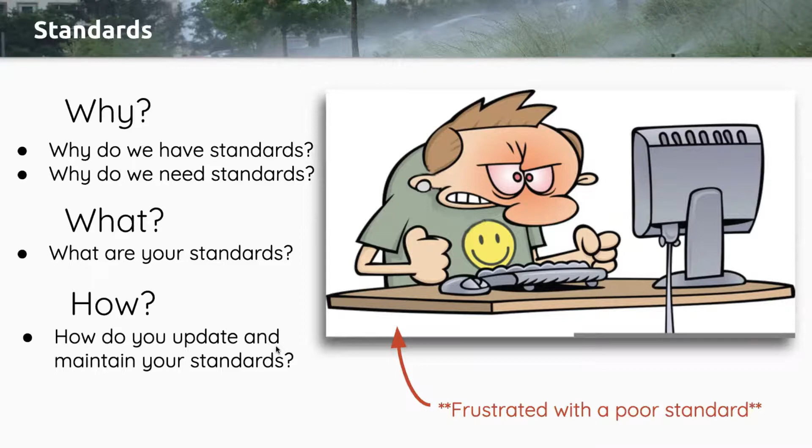And then how do you update those standards? How do you maintain those standards? So really, we talk about a standard as something to keep things organized, but if you think about it, a better way to describe standards is really a process for updating them. So it's more of an action—if I have a standard, it's about the process and how I can go about that.

Jer's donut analogy fits right in with this—it should not be static. It should absolutely be something that can change and should change. Things improve on a day-to-day basis. Everything we start to do, there's always something newer and better coming out. And to be able to roll with those and say, you know, I really like this look, or we should have donuts every other week because that's healthier than every day—this is going to be our new standard.

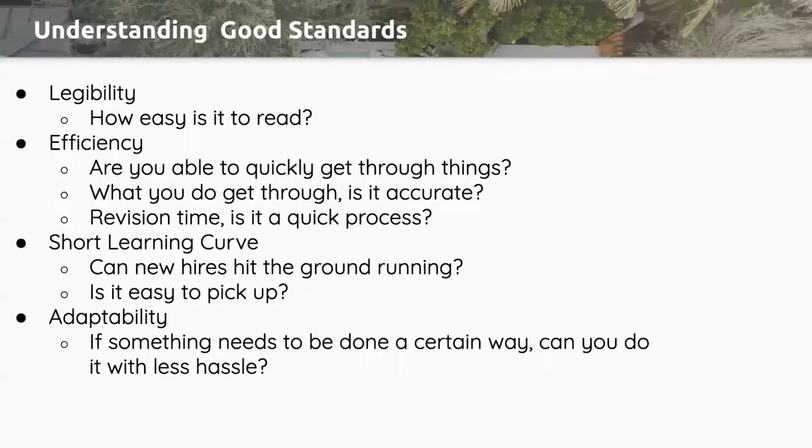So going further into what a good standard really consists of: how easy is it to read? What kind of efficiency are you gaining from the processes you're doing? What you do get through—is it actually accurate? How do you know that it's accurate? A huge one is the learning curve. When you start to hire people, on both sides of the spectrum, when you bring somebody on to help a project and they have to learn your standards, how easy is it for them to pick up? Or is it just like pulling teeth? And then how do you adopt and adapt to those certain ways.

I love this comparison, kind of a play off of 'my dad is stronger than your dad' type of thing - my circle's better than your circle. So we totally get that symbols and the look of plans should be your own.

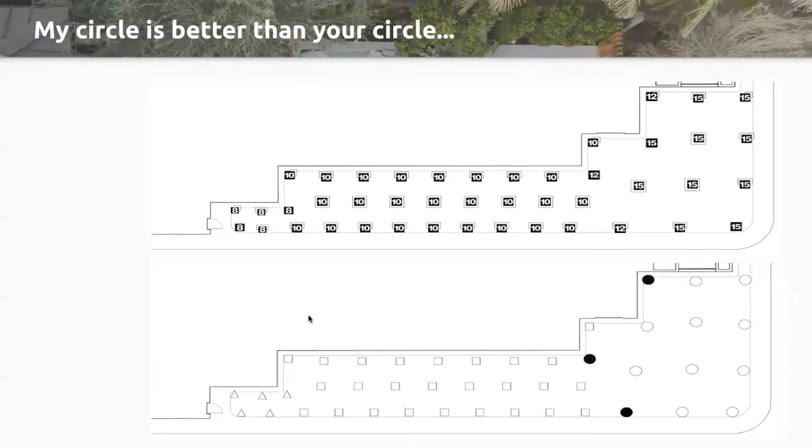But what we should also consider is what you're actually gaining from the way you're doing things, and what we're leaving up to the contractor, since that's the person doing this project. It doesn't matter how we think it looks on the plan - how's it going to get installed? We can talk about notes, callouts, and legends, but if we just take a simple snapshot of an area, who's going to know what's going on in the bottom versus the top?

So just something to consider as we look at upgrading and updating those standards to be more universal. Not only universal, but there is some lingo in the irrigation industry that leads to more typical and standard practices of reading stuff.

Another good point here is what you had access to when you first started your standard versus what's available now. Are you just sticking with what you're used to? Or are you able to grow and understand that there are practices, features, and tools to do the same work, or a deeper level of work, without any extra effort on your part?

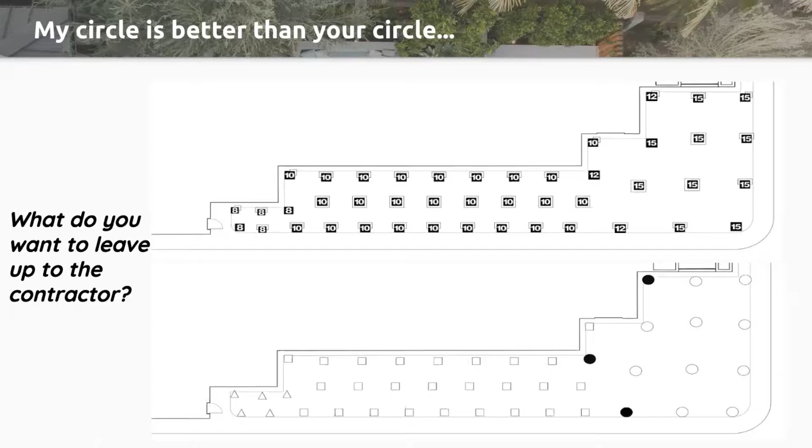Really understanding that after we set up specific standards for a certain client, say the DOT, we should end up with a set of layer states we can pull, templates we can use specific for these projects, and for maintaining, updating, and cross-checking the blocks and symbols, some type of master block file. So when we say 'I like that look and we need to update it,' we know right where to go.

Same thing goes for which blocks are going to be placed. That pulls into some Land F/X specific things with how our preference set is set up, and what kind of project template we have that already has predefined equipment and blocks set, so we can just use that boilerplate start up and go from there.

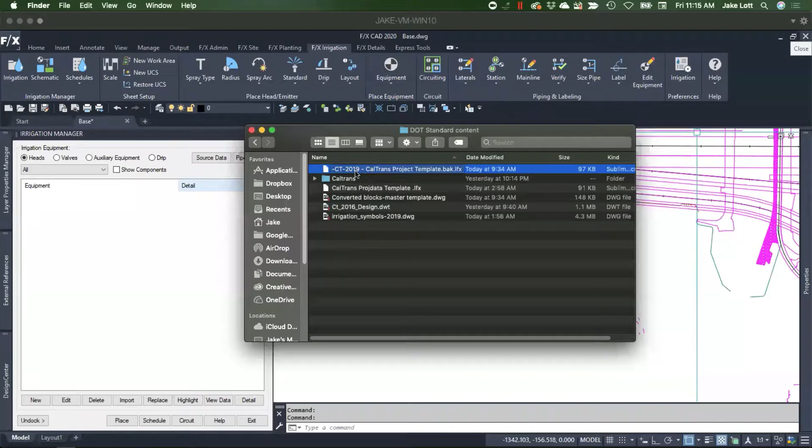So whether it's just saying typical pop-up and rotors, or a gate valve or a ball valve, all of that kind of stuff is really just set up into a project. When it comes to the fonts and all the other styles and stuff that you're kind of required to use...

On the specific website for said DOT, we're going to show this as an example, but they should have a standard that they're trying to enforce, which should include the fonts they're going to be using. Having that reference point of all those fonts you can load into your CAD installation is super important, because as we start to use Land F/X, we can just assign the right fonts appropriately.

So having that as a reference, but then going into our templates and stuff like that. Before I actually go into this, I did want to show one thing. Depending on how you get files from other people, or you're trying to bring in other people's blocks, there could be a potential that they have everything nested into one DWG, and that DWG has all of the different blocks available. So how do you actually sift through that and see a snapshot of what's in there?

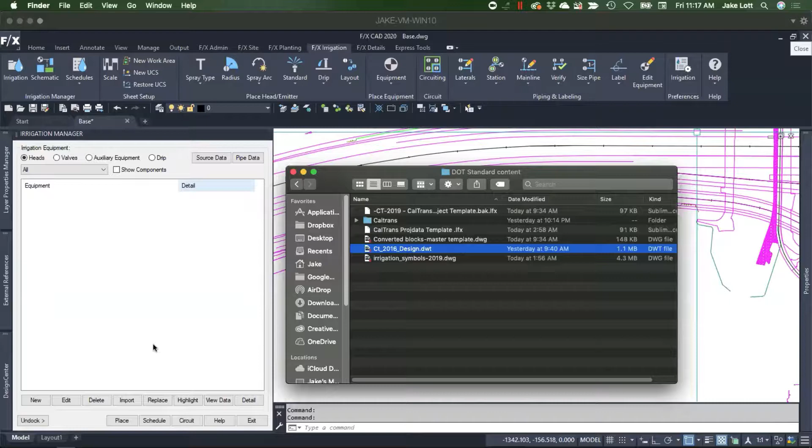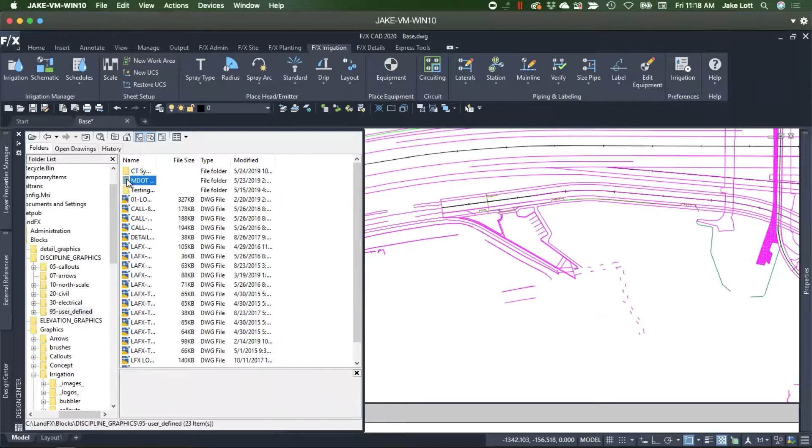A good resource is the Design Center in AutoCAD. This allows you to go into a said area. For example, I beforehand took a folder of actual blocks from a specific DOT, and I can actually see these items here. Now, it's got a bit of a limited preview, and they're not always good, so I'd say take it with a grain of salt.

So you can show things this way, but you can start to get an idea of what's actually in here. Now, again, this is super rough to look at, and you don't quite know what it says. So without doing any work, that was a pretty easy way to see what it all consists of.

But I want to show, we're not going to really do it, but I'm going to show you what BatchMan is able to do. You're able to add a file, add a folder, even make a preview slide, and save that into a specific location.

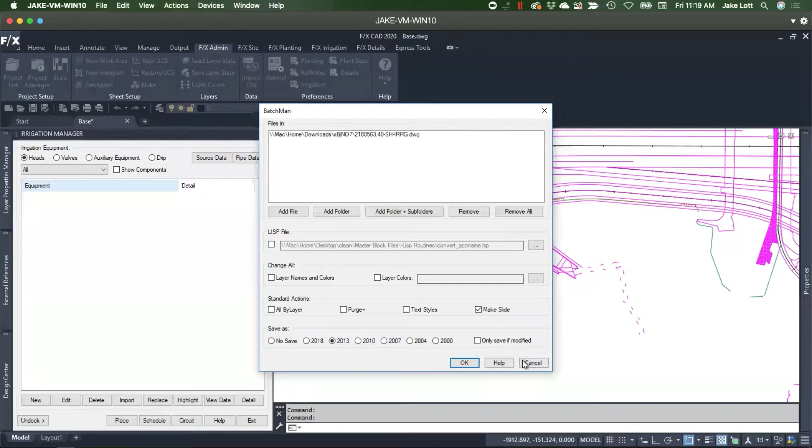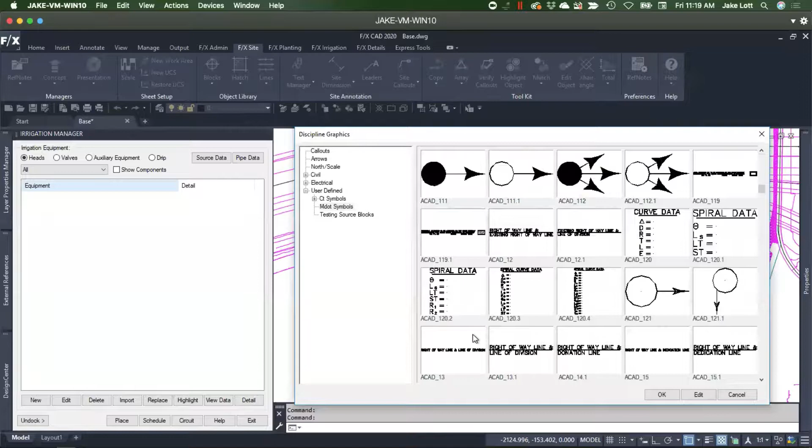So I'm going to show you the result of that. BatchMan is able to open up every one of those, shoot the slides so that we can preview them at a reasonable look, and come up with this. I'm going to go over to where I saved that. You can see this is a lot easier to see. At this point, I could actually start placing these blocks to see how they insert. So I have all of these already as individual blocks, and I can place them and see what they do, how they function.

So simply auditing what you have to work with and understanding what you have to work with is a super crucial step. So really utilizing, this is what we're going to be using today, and I'm going to go into this further, but really utilizing our blocks section to organize and manage specific standards.

So being able to see what kind of standards we are holding ourselves to right off the bat is going to allow us to translate that over to using it in our irrigation design.

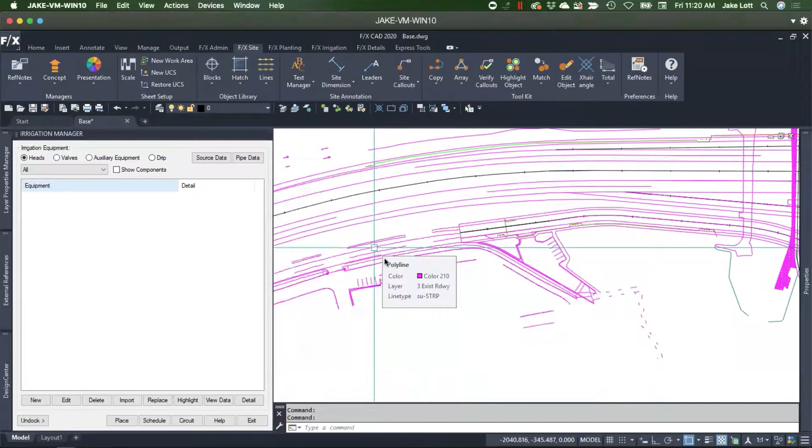So with that, I am going to open up a couple things here. This irrigation symbols file is actually our default way that we standardize, reference, and update, and create new, all of our different symbols that are being used for everything. To have this kind of level of detail is super crucial. You can actually see exactly what kind of symbol is going to be going in and what block name it's going to be at, and reference this point back to where those source files are.

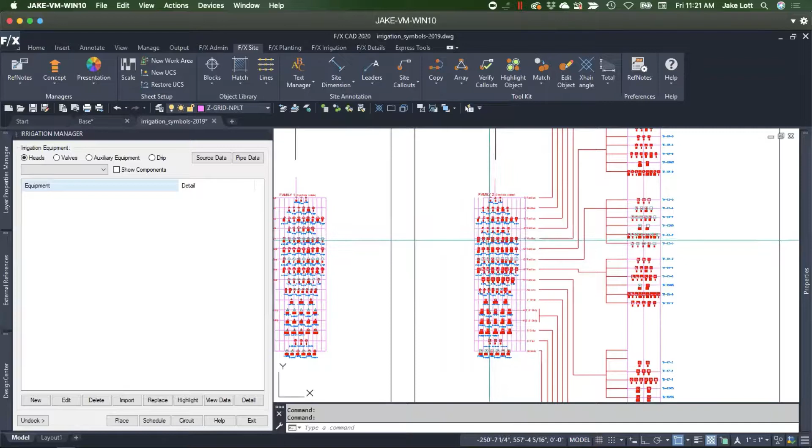So this is the kind of level that when we talk about a standard and how we're able to look at what they're going to look like, and then how we can even start to update things as time goes on. This is the kind of structure that I'm talking about.

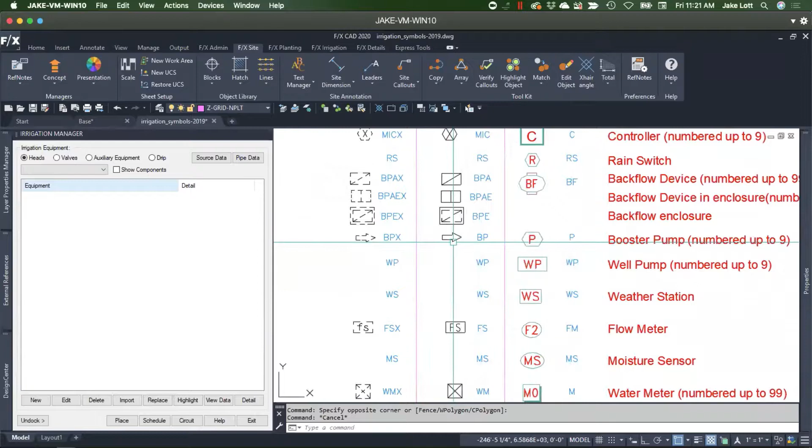What I was able to do as we were looking at this is really try to understand what your standard is. We'll consider this my original standard, what we've got to match, and what that actually means—finding pieces of equipment and lining them up so we understand: when I'm doing a flow meter, this is what I've got to make it look like instead of this. When I'm doing my water meter or point of connection, I've got to make it look like this instead of this. So how do we actually do that?

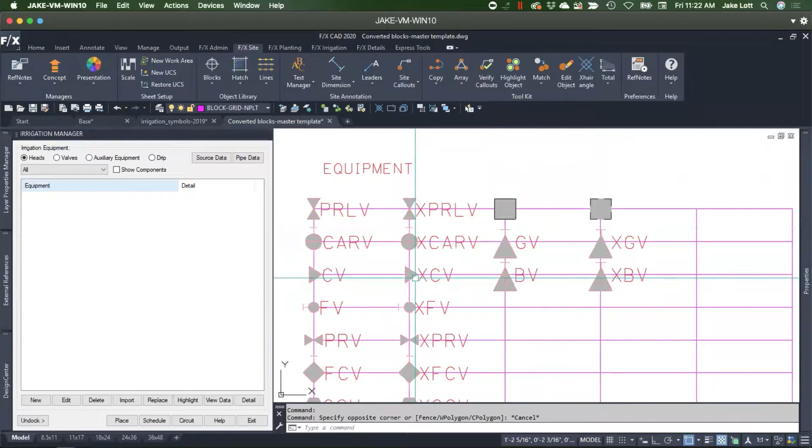Once we have an understanding of that, I'm going to open this template, because this is what we're going to base our stuff off of. I've got some predefined blocks in this drawing that I want to save into the system so I can just drop them in all together.

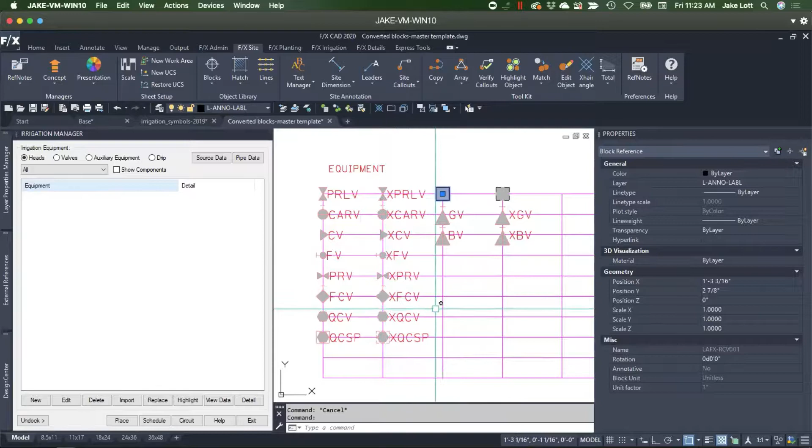What I've done—we'll go into a couple other examples in just a second—is open up our properties. You can see I've already named each one of these blocks. Even though it's not my own block, I've named it the same as I would normally name my other standards, the ones in my LandFX folder. So if we're just trying to match somebody else's standard, this is a great way to set up their blocks but with your block naming structure, so you don't have to put these in your LandFX folder. They won't get used anywhere else other than the projects you want them used in. It makes it very smooth and seamless.

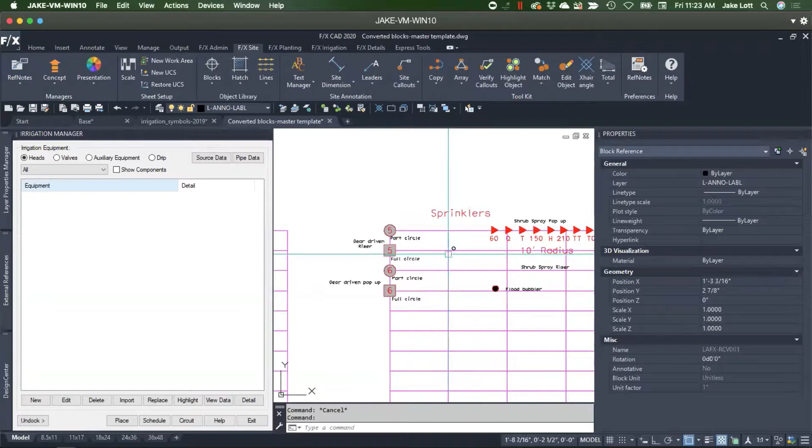This is what we're going to be pulling from and creating when we talk about needing to stick with a certain standard. Now, take this with a grain of salt, but my standard is that I have literally one symbol that identifies a spray pop-up, a shrub spray pop-up. No matter what radius or arc I put, it's the same symbol. So how easy is that for the contractor to read on the plan?

But how easy is it for us to actually identify and pick out the right quantities and all that stuff? So what I did is I took my main resource, kind of what my symbols used to look like, took that structure, and replaced each one of these blocks with my own single block.

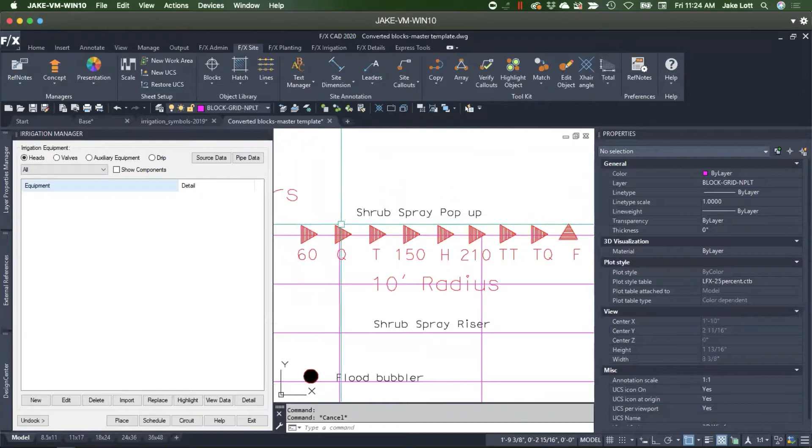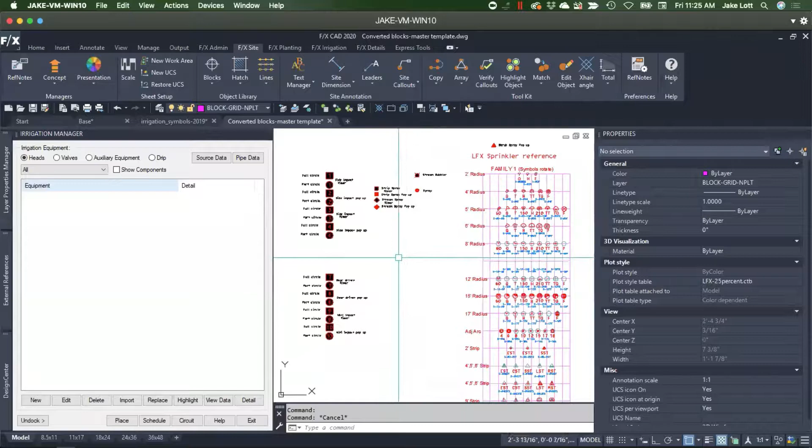This might be a little confusing, so I apologize if this is jumping around a bit. But that's what we have to do to any one of our radiuses, because Land F/X is really focused on placing things by nozzle, not just by a head specifically. So we still need to place a nozzle, which means we need a unique block for each one. That's why we're setting it up this way. But at the end of the day, it will look just like we want it to here.

Same thing—if we just want a single flood bubbler with just a flow to it, not the specific nozzles for the flood bubbler or the options, that's how we're going to do that: just set up our unique blocks and name them as we would if we were doing a normal project.

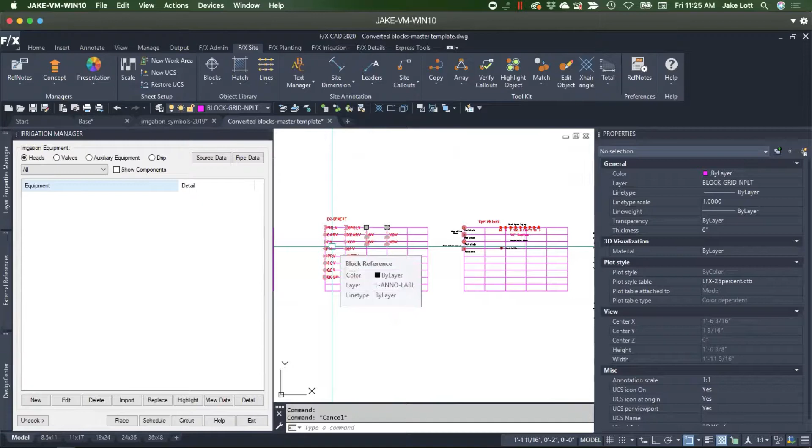So with that in mind, we also need to match our valve callouts. That's another huge one that really differs from stuff like that. As it pertains to symbology here, it also pertains to the callouts we use, the text styles we use, and stuff like that. So let's put a pin in this for a second—this is all project based, and what goes into our irrigation manager, we need to know how those are going to look size-wise, font-wise, all that kind of stuff, and that's really in our preferences.

So if we were to go to our irrigation preferences, we can see that this is the boilerplate that's going to be used for everything. So we should not be using our normal standard preference set to make these modifications—we absolutely need to make a new preference set.

If we didn't have anything other than this one, hitting manage and hit new is going to copy the settings that we already have from ours. So it starts us at a specific point, and it allows us to make another preference set specific to whatever it is we're going to do.

I don't need to do that because I already have one kind of set up. But you're going to notice that I can now set up unique symbol families that I want to pull from or use as a reference point. I can now set my unique valve callout to the way I want it, and we can see that this doesn't match our full standard, so let's show you how to actually customize this so that it's there and able to choose.

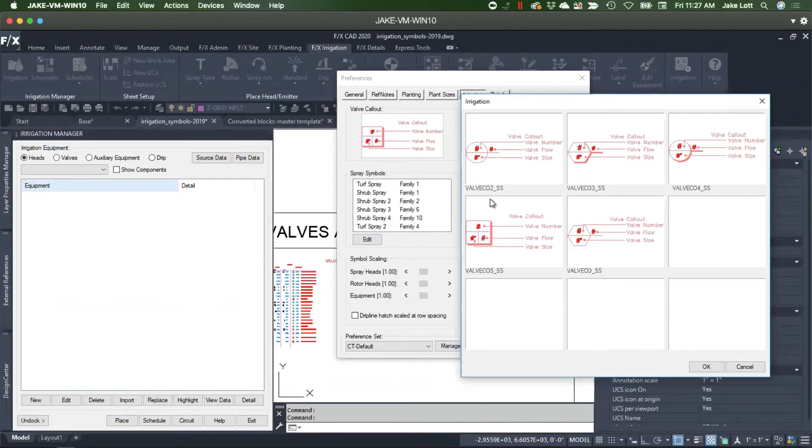So these are the block names, and we're going to basically take one of these that might be close to what it looks like, or not even at all, and we'll just recreate it. So we can take VALVECO5, and we're going to update that guy here.

So what I'm going to do is I'm going to open up my Land F/X folder. I'm going to go into the blocks, into graphics, irrigation, and I'm going to go find that actual callout. So if we decided that we wanted to just go to the next one available, I'll go ahead and open it up.

We have a right and we have a left, so that's one thing we've got to keep in mind, the right and left version of those. So I can just open this guy, and I will open the right side of that, and we'll start making our changes here.

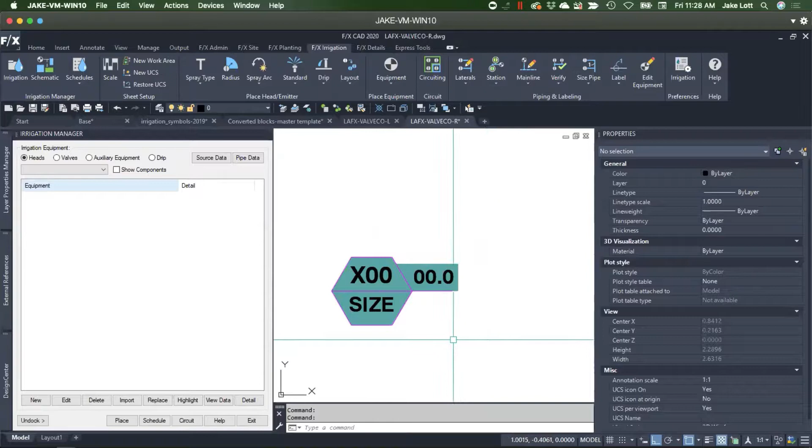While I get this ready, Jared, is there anything you want to interject with? No, I think you're doing good. We just, we do got a couple great questions. When I said try to save time. Okay, cool.

So what I'm going to do is, we obviously want these new callouts to be comparable to what we have already existing here. So I'm going to use this as a reference.

I just moved it up, and I'm going to take one of these calls. Now these are these attributes here, and these attributes, we have a whole list of attributes that are allowed in callouts for valves and stuff like that. So I'm not going to get too far into it.

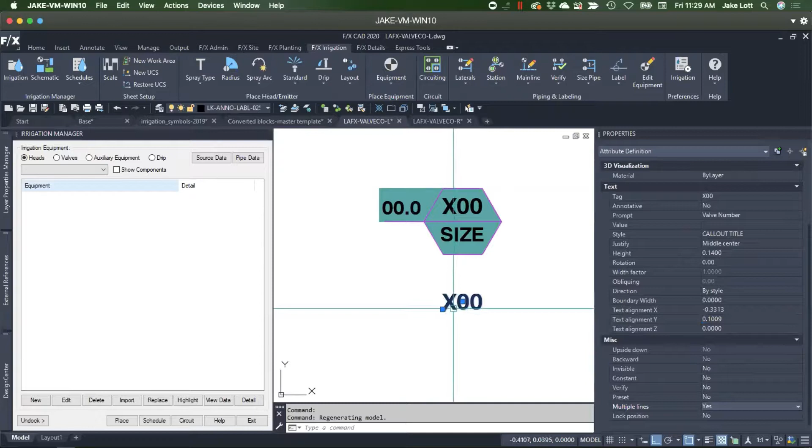But what we can do now is I'm just going to go ahead and make a copy of this guy, and I'm going to bring him down. I'm going to make sure he is set to multiple line, and I'm going to double click on him, and I'm going to start putting in additional deals.

So maybe I need the actual valve number, or sorry, size to go first. So I can say size. I can say valve number. I can say heads, which is a great one that we just added. And I can say GPM.

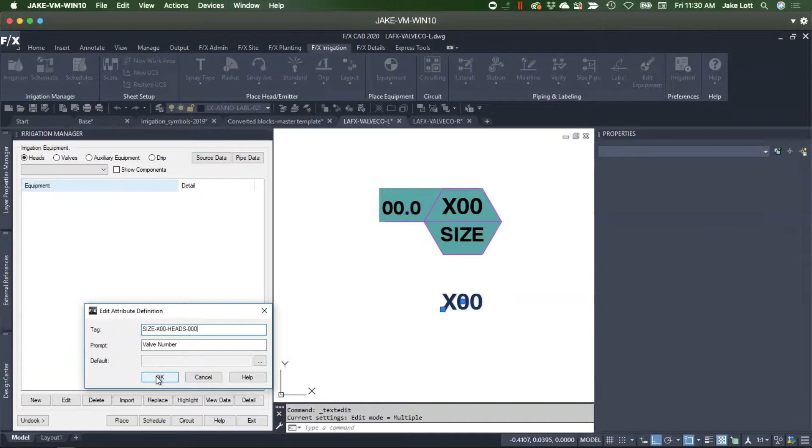So being able to put several attributes into one attribute is going to be how we basically make this happen. So if I do that, you're going to see that he's obviously a lot longer now. And my standard is we're going to make sure that we match this here.

So I'm going to go ahead and do a polyline, and I'm just going to recreate roughly what this is going to look like. So that's what I want it to look like.

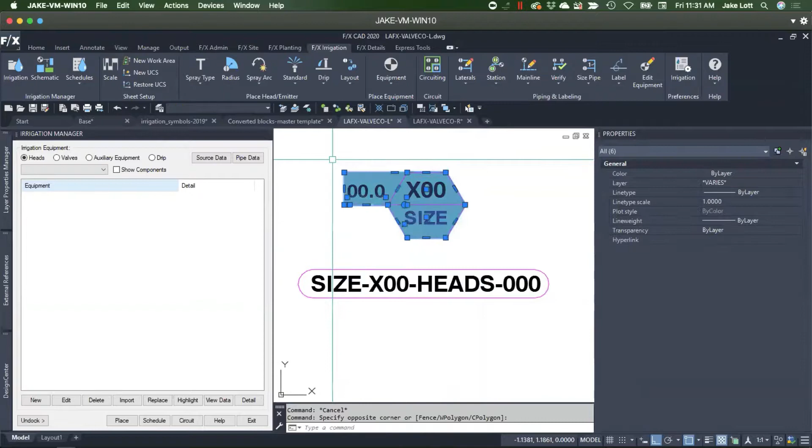I can even then modify things to be on the proper layers and stuff like that that I want. But now I've got to definitely move it into the right spot. So I can get rid of this guy. I've got him, and since he's the left callout, he's going to be pulling from essentially this side here. So I'm going to move him from here and move him to 0, 0.

So if I was going to have a leader on there, this is what it would look like. That's going to be my kind of reference point. So I can zoom extents, and I can M-slide to make a slide for this area.

So we actually want this thing to be called VALVECO-L. So we're going to go ahead and save him. And I'm just going to save time, and I'm going to copy this guy from a different spot here.

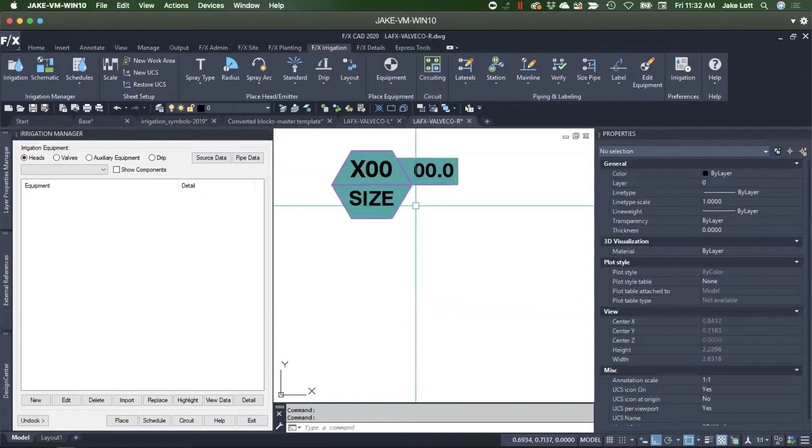So now I can go ahead and go over to my right. I'm going to paste it at 0, 0. Now, the one thing I didn't make sure of, and it's actually good still, is how it's justified, how the font is justified, how it's going to roll and fit within this thing. So there might be some tweaks we need to do, but it looks like I'm centered, so that's great. I can do a little test of a polyline to see where my right's going to come.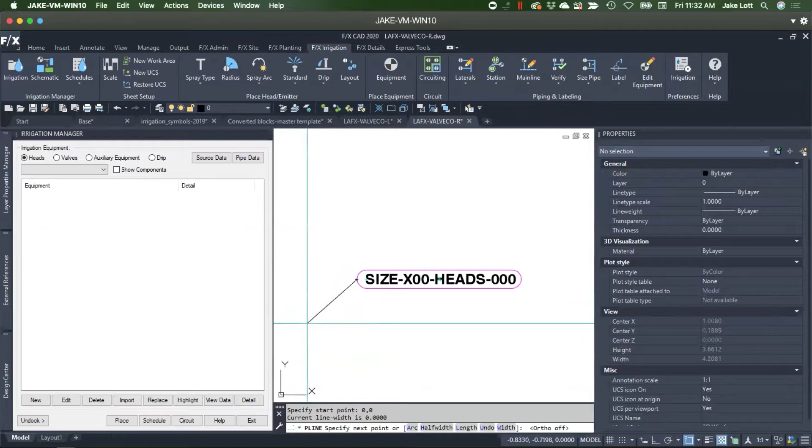I can also zoom extents and make him number 6 as well. So he's good here. I don't want to save over this one, right? Because we just did it as 6. So I'm going to just do a save as, and I'm going to plop a 6 in there as well. Do that same thing to here.

All right, so now I have two new callouts that we just created for that. And the really cool thing about this is now, if I even need to show these callouts as proposed versus existing callouts for valves, I can just make a copy, make it number 7, turn this to dashed or break it so that it's a nice dashed look.

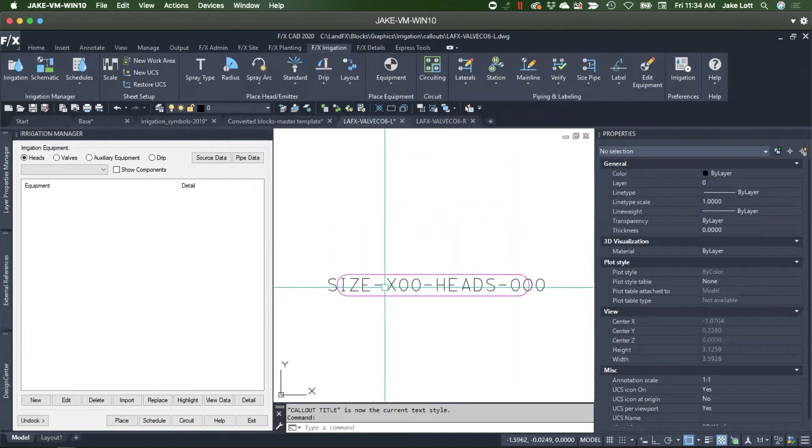And we've already got now a new callout for our existing stuff. So the only thing different here is I really haven't matched the standard from a font style perspective. We can see that callout title is being used here. And the really nice thing about this is if I make sure I'm set here, and we make sure this is set to my proper fonts for that, it's going to update itself automatically. Now it looks like it's sizing it up over it, but I'm sure my size is actually going to fit within this pretty well, and we can make those adjustments if needed.

So I'm going to leave it as is, but I'm just going to make sure that I set the right text style. Oh, try that again. Clicking too fast.

There we go. All right, so I'm going to save that again just because we changed that font. And we are going to close these guys.

So there's one other spot that I've got to make sure, because if I go to my preferences again and try to pick that new valve callout that we just did, you're going to notice it still doesn't exist, because these are referencing our schedule symbol block. So if we simply go over to our callouts, I'm just going to grab the right version of that block right there, copy it, go over to schedule symbols, and paste it.

So what this schedule block does, the benefit is if I'm going to actually have this show up on a schedule, I would want this to point to these things and say what they are, that type of deal. So I could clean it up if I wanted to, but for this purpose, I'm not going to. I'll just leave it as is.

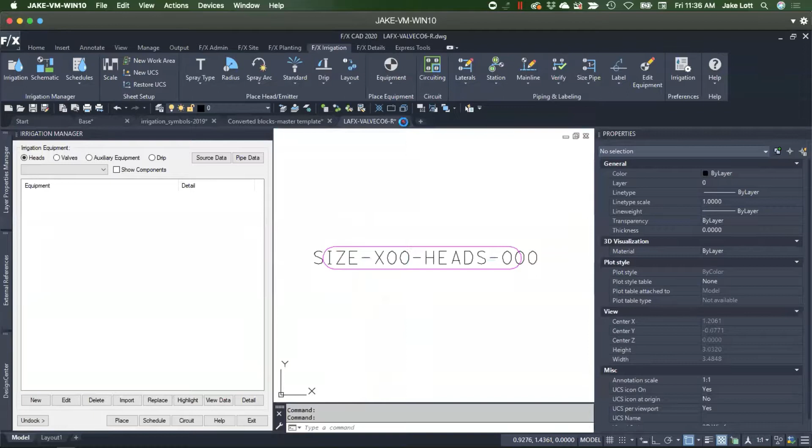But if we go ahead and come back over, you're going to see now we've got that new version. So this could be our default, and we can say OK. And now for this preference set, I will have a new callout there.

Should have changed. Huh, do you know why it's not changing, Jer? Sorry. You know, it was changing for me before, so I'm not sure why. I'll have to look at that. But change it to something else and change it back or something? I'm not sure. That changed. Well, I should—okay, it should still come in. So yeah, it'll come in. So we'll just leave that for now. Sorry.

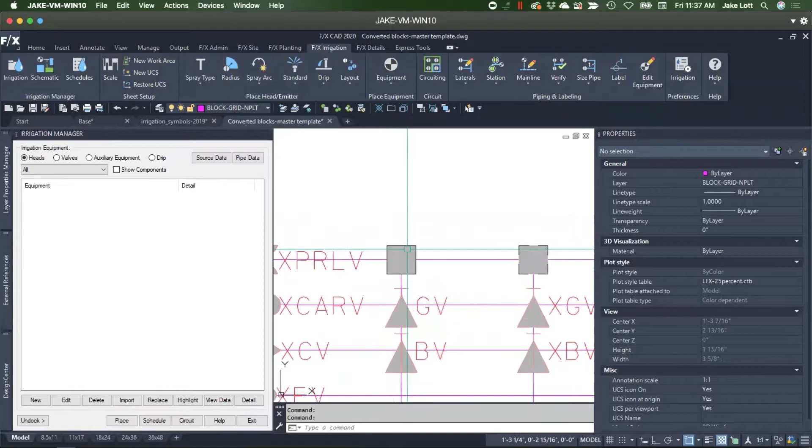So we've now made a custom block, and when it comes to dash stuff, you'll see this even in our blocks here where we've got our dash elements, to simplify it and remove the element of line type scale and stuff like that for simple things like this, my recommendation is not to make it a line type, but to make it individual lines. That way it'll work no matter what scale you're doing it at and any of your settings, because it can confuse you as you go if you don't have things set up that way.

So the blocks are made. We've got a few examples here. Let's go ahead and just sort of get things placed into the drawing. Let's see how this works.

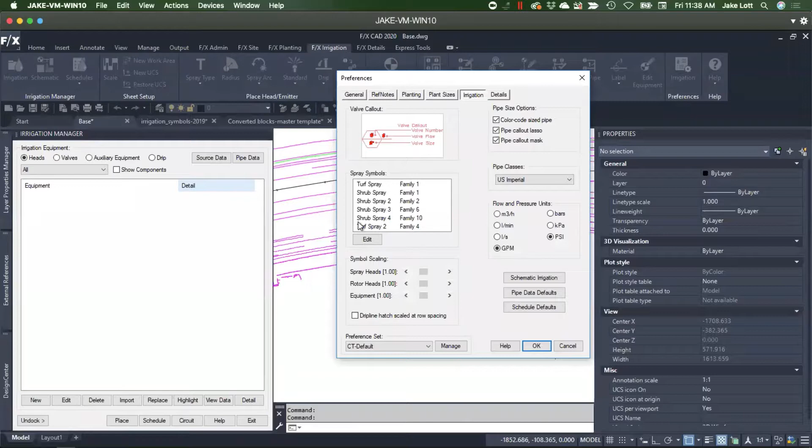I'm going to start out pretty simple, and I just want to show what is happening when I actually have even my preference set up basically just like this, without doing anything, because we haven't really tied the changes and the different blocks to what we're doing here. So this is what kind of makes it really fancy, is we can actually add a turf rotor real quick.

And again, we can assign specific symbols here. So at this specific position is where we want to start thinking about what our normal symbols look like, because this is pulling from our database, and what we want from a block naming perspective is what we want our new blocks to be named so that we can pull as a reference. So if I know that my rotors for, let's just say, part circles are going to be one block, I can set my part circle symbol as A104, my full circle as A105, and that's a rotor pop-up, let's just say.

So we're going to add it just like this, and I'm going to show you the comparison here. So we'll say okay, and we'll add him in there. So he's just added as that piece of equipment. But if you remember, we've got a few of our own kind of symbols that we want to use instead of those. So you can see that I've got a nice way that I can see what my different styles are that I'm trying to adhere to.

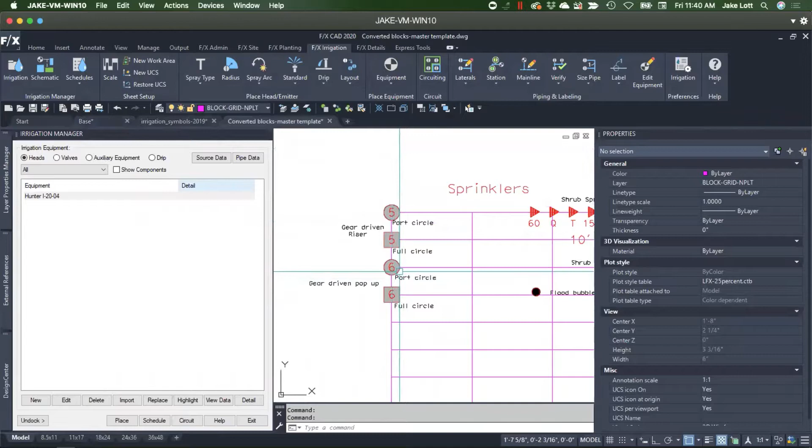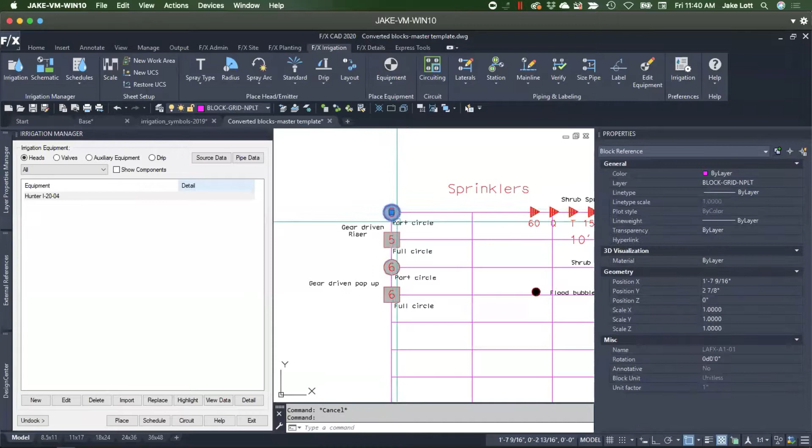So if you look, I've named that block A104. Even though it's not named that way in my Land F/X folder, I've got him defined that way in this specific master template file for my DOT work. So if I look at that and I have A105, I got A101, A102, I know these are going to be how I kind of start to set up my project, my equipment. And as soon as I have those set, they're already predefined for those other symbols, but it's really the block name that we're concerned about.

Because what we can do is we can take all of this content and use our site tool. So referring back to the beginning when I was saying the blocks section is a really good place for us to save this kind of content. So once we have our whole setup, how we want things to look, and defined as specific block names, I can go ahead and save this as an entire block.

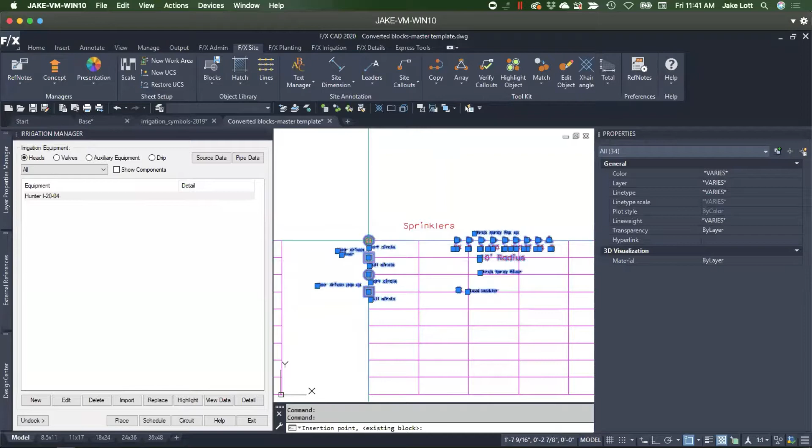So it's asking me to pick an insertion point, so I'll go ahead and pick here. And now where do I want to put it? This is where I get to go into my own structure of how I want to organize this stuff. But under discipline graphics is a good user-defined section that I've made a few different DOT areas. So depending on how you want it to look, go ahead and place it into this structure.

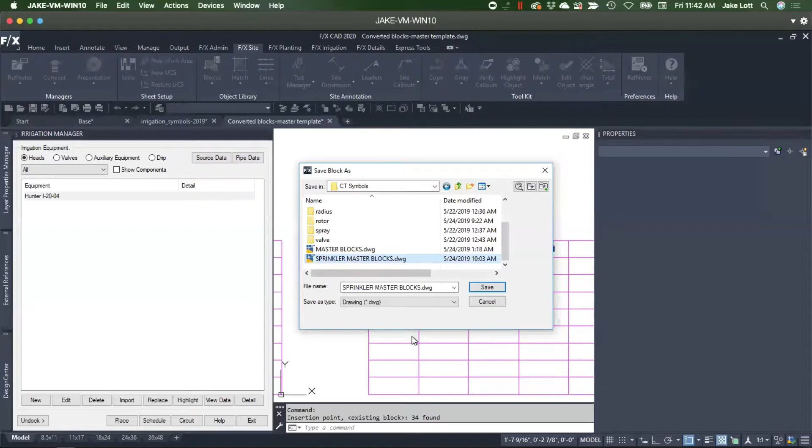Now I've got a few in here already saved. So this is the guy here, we'll just overwrite him here. But what you're going to notice is it tries to do a preview, and this preview is based on what's in the drawing here, and we've obviously got a lot. So we're going to reshoot that slide in a second.

But we can set it to dim scale, which means I can place it into my model space of my design, and I can start to test how those even look right off the bat. So we'll just go ahead and say okay to that. But we're also going to go ahead and open up that block that we just made, so we're going to go into that same folder structure, and you can see this is where it is. So I'm going to bring him into view.

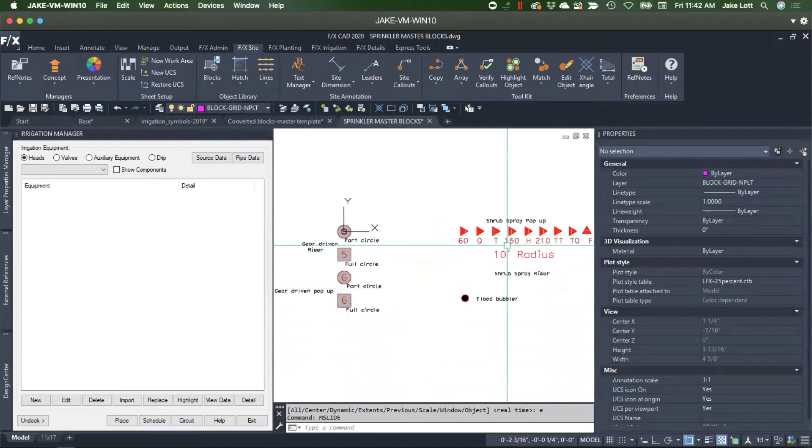And I'm going to do an MSLIDE to this, just like we did for our callout, and replace that slide file. So now if we look at what that actually looks like, you can see he's a lot better than whatever that preview was before.

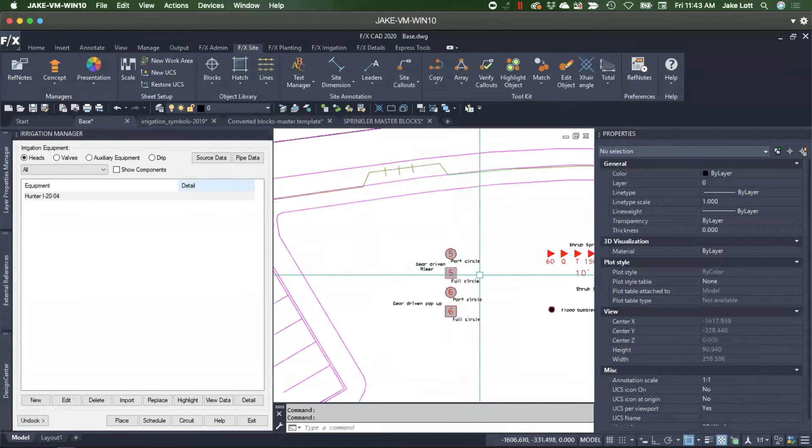We'll go ahead and leave him that way, but we'll also bring in this set. If we go into our user defined, pick this guy and define him in the drawing, you can see this is going to be at, and again I've set my scale. There's other things we should already know from setting up projects, but this is how the blocks are already going to be looking, which is a really good indication of how it is.

And you can see if I explode this guy, these are now defined in the drawing as said blocks, even our spray symbols. So we can actually add, if we go ahead and add a new shrub spray, and we'll go ahead and pick him.

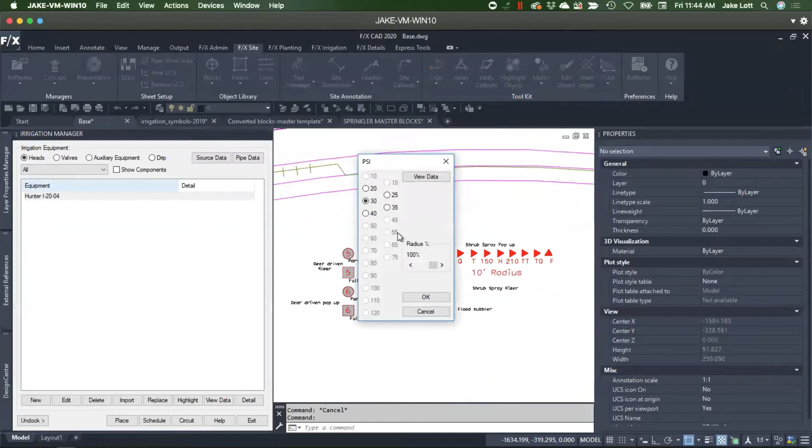This is where we get to be able to set that project, those parameters there. So if it's something that we're trying to say, something like a typical shrub pop-up, and clean up the description how you want it. This is how we start to kind of isolate unique pieces of equipment for this specific type of project.

We'll say okay. Now, granted, I only did the 10-foot radius, so you'll notice if I go ahead and try to place this guy here, and I place an 8.5, he's my normal symbols that I have in my Land F/X folder.

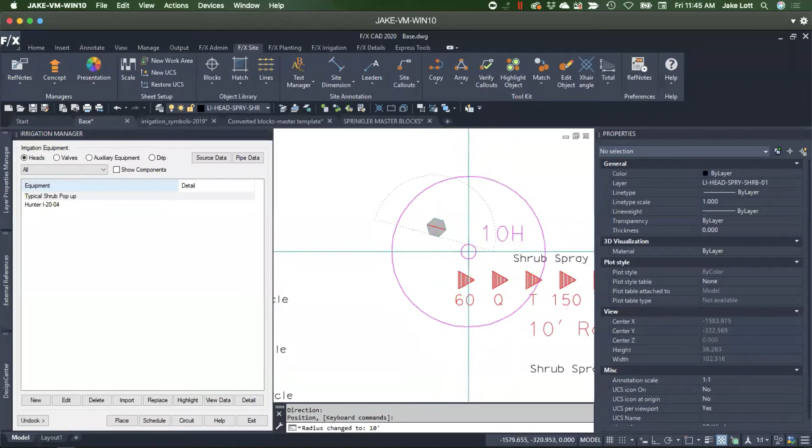But since we've defined those in the drawing already, I've now got the ability to place all of these different options just like this, just like I would normally be able to with Land F/X, and have the ability to really hone in the design. Or come along here, and we'll go down to a 10H for this example, to be able to lay out things much faster than what we would normally be able to do in a plan like this.

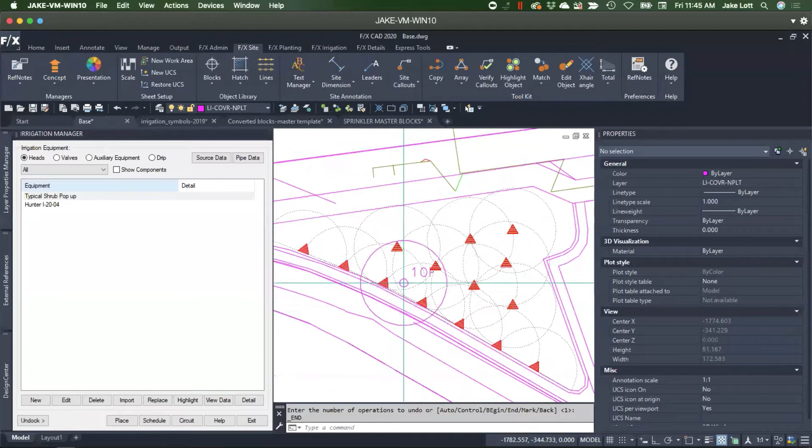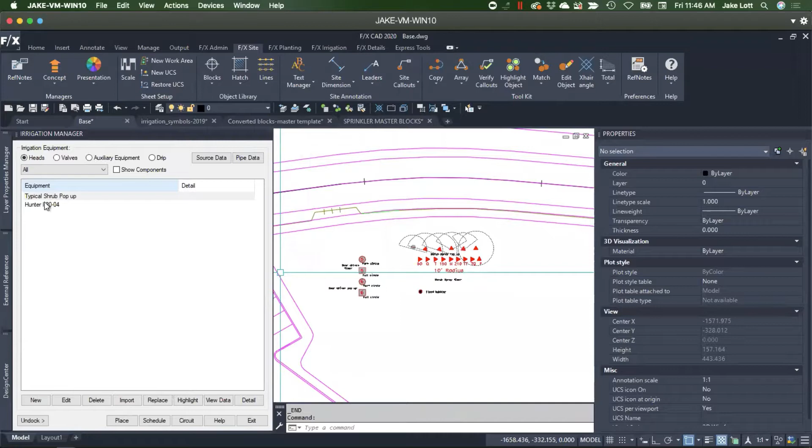But really, really starting to harness in the power of actually designing stuff while still sticking with this. Even though I never changed a single thing in my Land F/X folder, just simply dropping this initial block in allowed me to do this, which means I could set up a project with all my stuff that I normally use, and I could actually use this, which again, take it for what it's worth, or with caution.

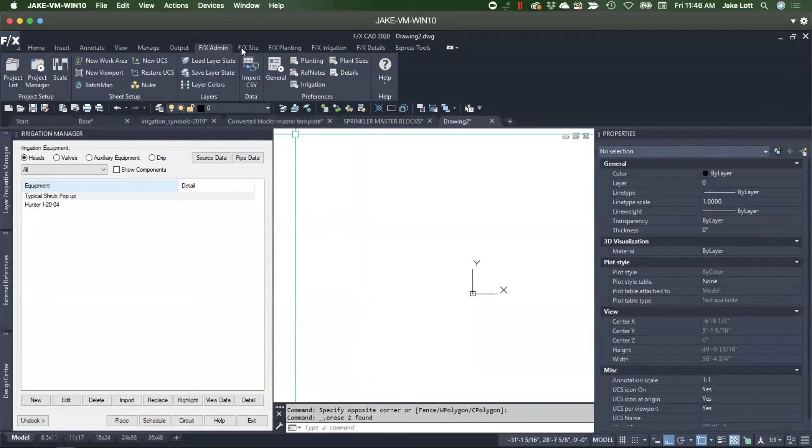Literally be able to pick that same project without any other changes, and place this, and you'll notice that my 10H is not that symbol anymore, even though I'm using the same exact equipment. It's because I have predefined the symbol as Land F/X this way, instead of first dropping in that discipline graphics blocks that define that block already in the drawing.

Which means we can set up templates to make it even faster. We can set up templates with those blocks already placed into paper space or off to the side, ready for you to just open up and go.

So I am going to pause here because we are starting to get close on time, Jer. Do we want to go back on anything here, or?

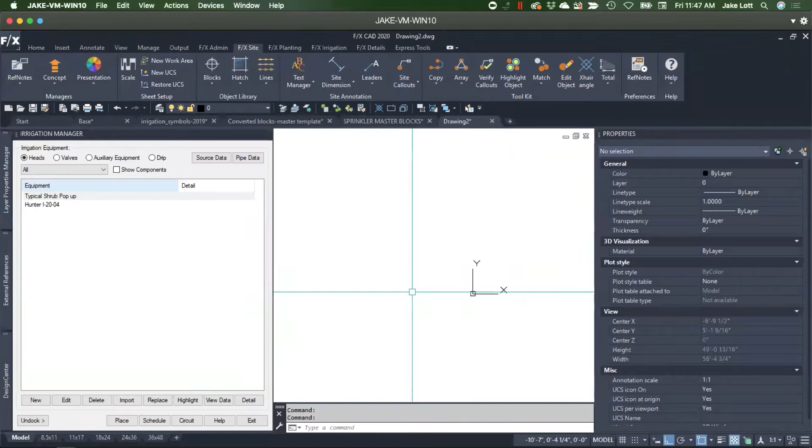Well, if you wanted to go ahead and just wrap up, I got these two questions ready. I want to get this third one ready for you. So while you're wrapping up.

Perfect. Okay, so again, as we start to look at this, I think it's a really clear indication of being able to snapshot or start to hone in on your own standards. This was from the perspective of a user trying to adhere to a specific standard.

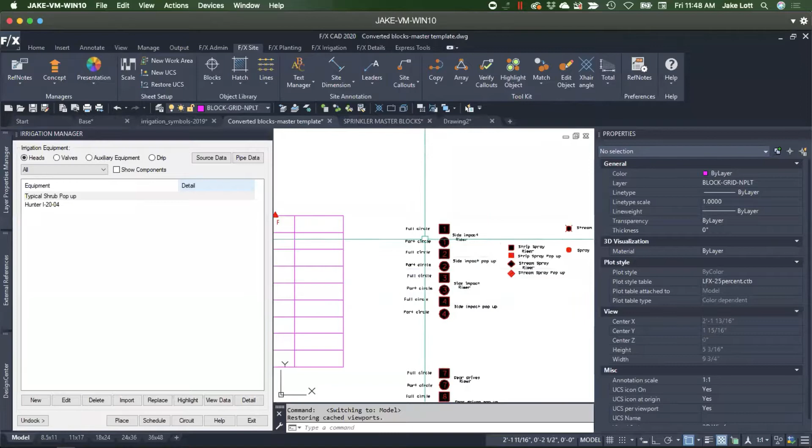But even then, looking at your own standards and setting them up in a fashion that is forward thinking and thinking of others, how are they going to adapt to these standards easily. Trying to set up some fashion of this in a way that is easy to read and a way to streamline that whole process is definitely, I would say, a lifesaver on all ends.

So if anybody has suggestions or worries or frustrations that they've put out for this, let us know, because it's just super important to be able to get the work done and not have to worry about trying to figure out how you're actually going to adopt them.

But we have tools to do that. So the same thing goes to, as we're setting all this stuff up, setting up the projects and having templates.

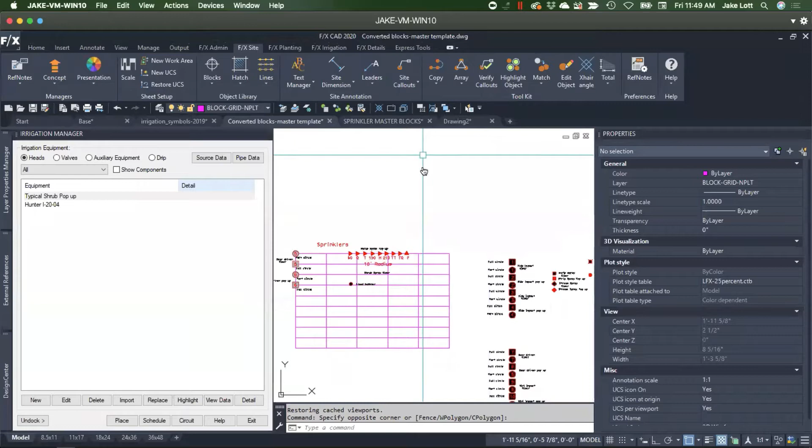We sort of touched on that right at the first. I showed you a deal here. And if we had templates given to us, we run the risk of getting this kind of stuff. We stress here at Land F/X corruption and proxies and that kind of stuff, and cleaning drawings.

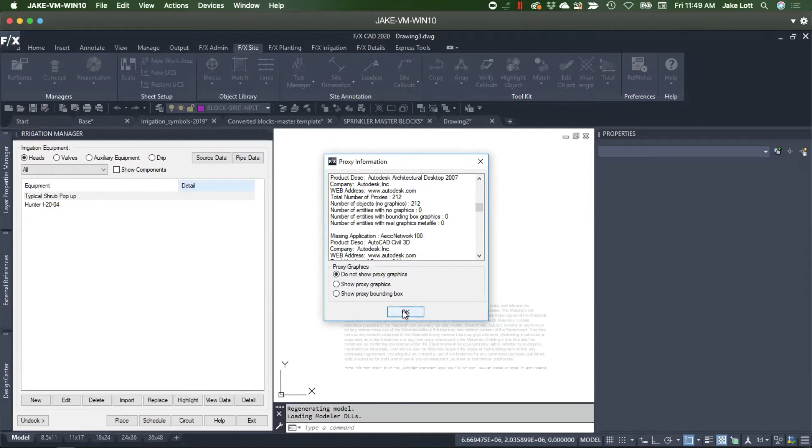This just gives us a really good chance to start eliminating some of this stuff that's going on. This is just a template - it doesn't have anything in it, and this one is full of different things. So how do we try to minimize that while still benefiting from everything that's already preset up, or what we want to preset up?

The last thing I want to show is a really cool tool. If we go to this Drawing2 that I have, where I really don't have any of the right layers in here - how do I actually get them in without drawing lines and copying them into this project and potentially bringing over the corruption that way?

To be able to save specific layer states, I'm going to make a new folder in here. We'll call it my DOT standards. Within this folder, I'm going to say this is all my CT roadway layers - we'll say all. So I know specifically in this drawing, I had all of those layers, and I want to just save all of those. That's all I had to do.

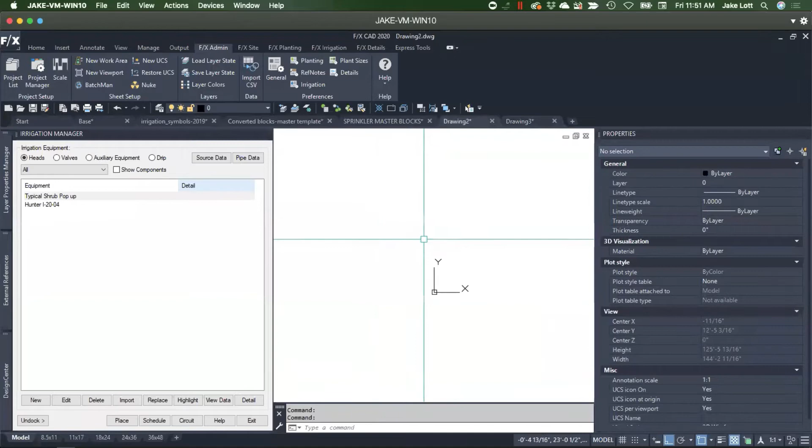I can go back to my other drawing and use the load layer states button, and it allows me to pick through. It loads them all in with all of their settings the way they were set up. So now I have a really clean way to do this - I can start deleting layers out and sectioning them into different layer state names so I'm not getting everything, but I can start pulling what I need.

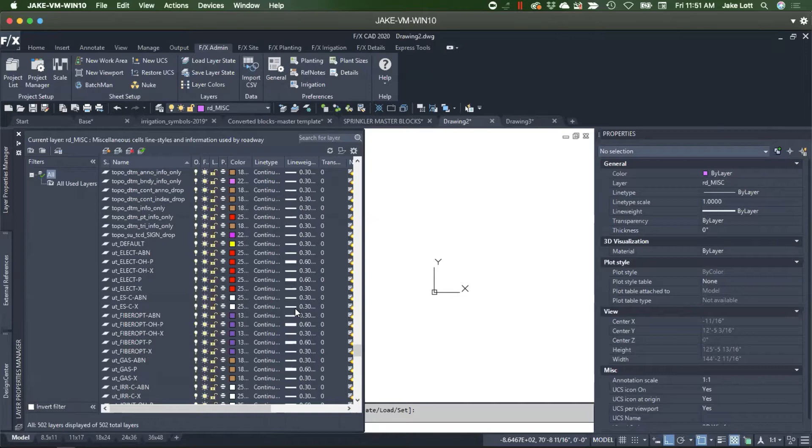So liken this to asking what irrigation layers we want to have standard. Obviously there are some in the preference set that we would hold to, and the colors those get. But any additional layers we want to start wrapping into our templates - this is a really good tool.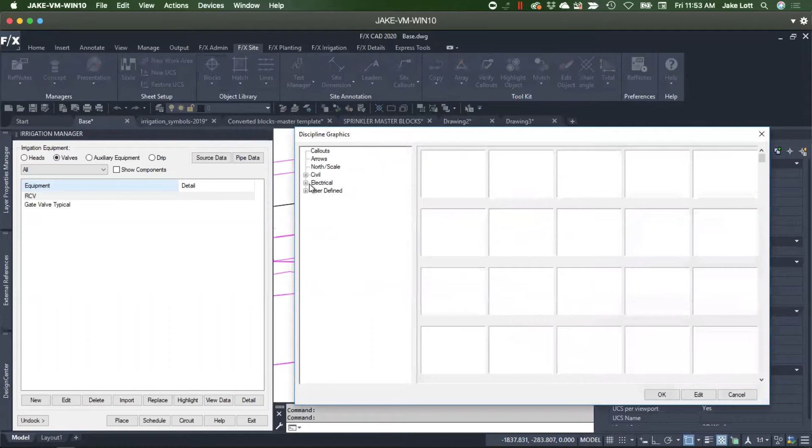Let me redo that, not to sidetrack here, but I have it all set up - you might as well bring it in and use it. So there he is, let's just place that valve one more time. And now it's my pretty valve that I want here.

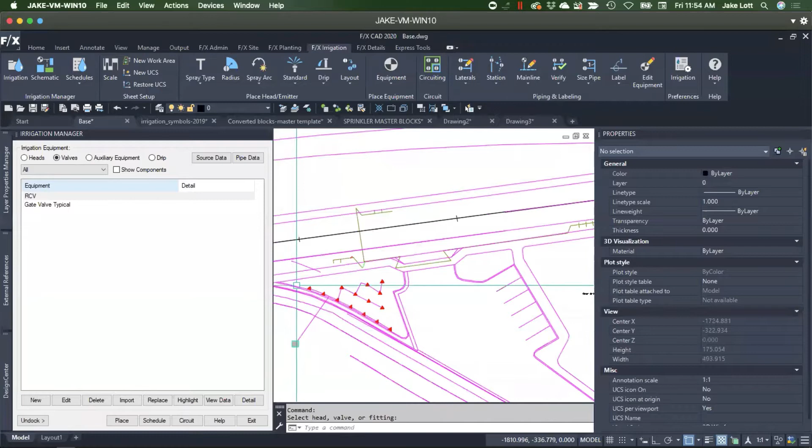So with that, and how we can do that - this might be too small of a section, so we'll see actually what this does. I'll move it here just in case. So there's that - we have this custom line tool. Based on the active layer here, if we go to our LI pipe...

Are we doing a little t or a big T? I guess a big T, let's do a big T. Say okay - it's automatically going to convert that active layer to that line type automatically, which is actually just one of my favorite things, I think.

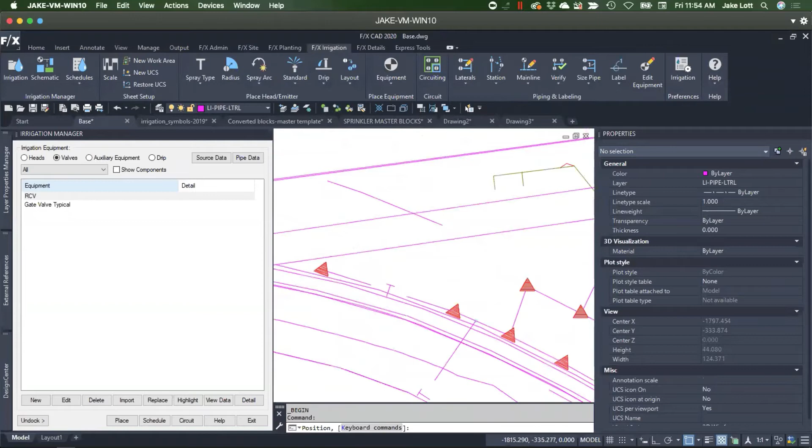Super cool, so that is there. Obviously then what you're saying is save that into the save layer states as that specific one, because in its properties you're going to see now he's set to line T. So you could set up all of your LandFX layers and stuff like that with any of the custom things here. And if you load those in, since it's already defined in the drawing, it's going to use those first and look just like you want it that way.

So we've got him in there. Let's just double check that I have the right callout assigned to this guy, which I don't. So we'll set him and let's give him a shot, shall we?

Okay, go ahead and do that. Oh, no, he's not pulling that guy. So why did he not pull that guy?

Do you want to ask your other question while I work on this? Oh, the other one is relating to valve callout. If you want, shoot. So we're going to go to our callouts here. Let's see why. Valveco 6.

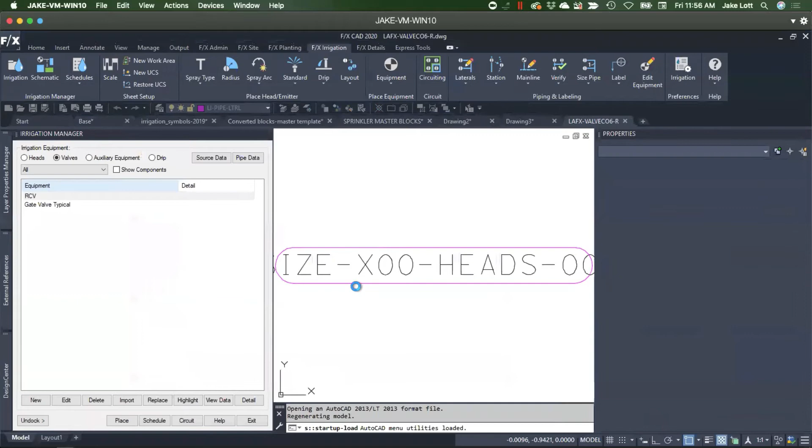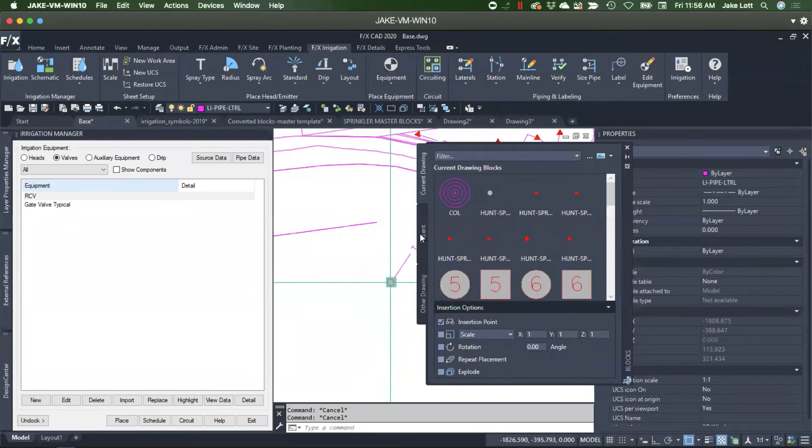He's good. It could be, I mean, I don't know if you don't have any other valve callouts defined in the drawing. No, this is all I have. So try to troubleshoot this. It was working just before, ironically.

Well, you can have it set to the valve. Let me go ahead and just see. Valveco. Oh, I know why. Look at me and my troubleshooting skills.

I made one big boo-boo, and that was in my schedule symbol. I left Valveco as -R, not _SS. That defines it as a schedule symbol.

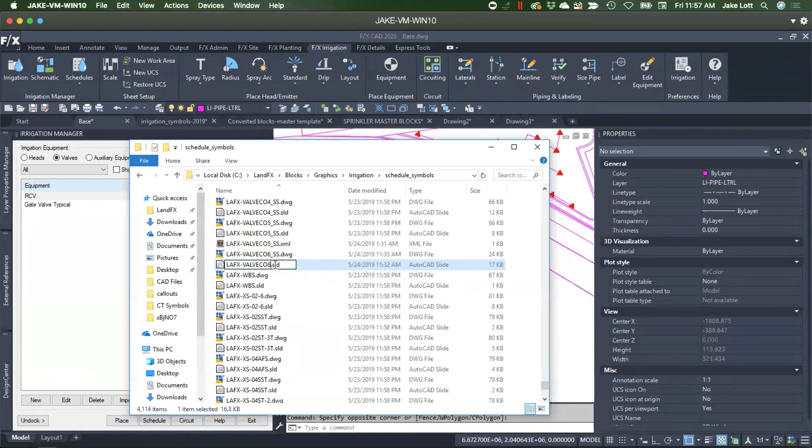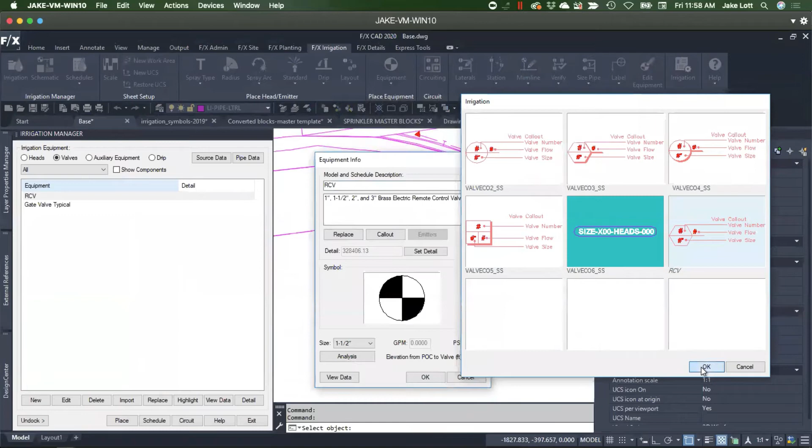Curses for copying things. So this will work now. It all makes sense, garbage in, garbage out. Okay, so let's just double check this guy here. He's good. All right, now I can label it.

Yep, so there he is. And you can see he obviously doesn't have a flow yet. So why don't we go ahead and size this guy? There you go.

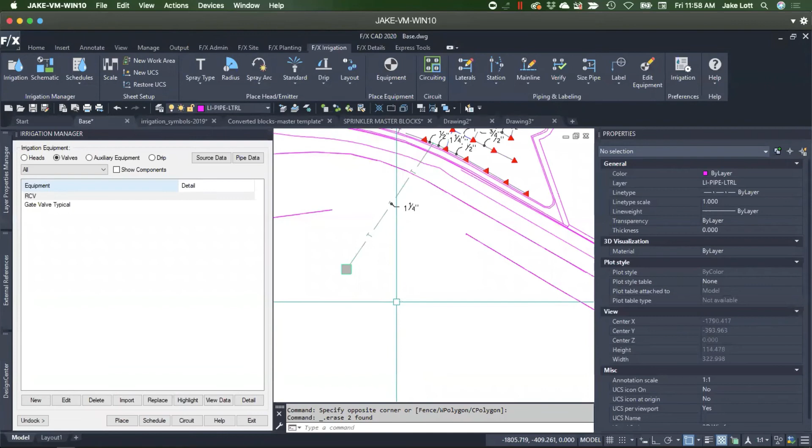And then related to the valve callout was the other question, which I really liked this one from Amanda. If you want to go ahead and just erase that callout, we'll put in another one. But she was saying their standard is to put a number in the area. For her, it's a drip area, but it'll work for this, that correlates with the valve number.

And I was thinking, well, you could place the valve callout right next to the valve, right click for no arrow, and then move the number indicator over there. That could be a solution. Okay, so you're saying if I do this, place it right here, hit escape? No, you need a right click. Oh, because you want the identifier, the number indicator. Got it, sorry.

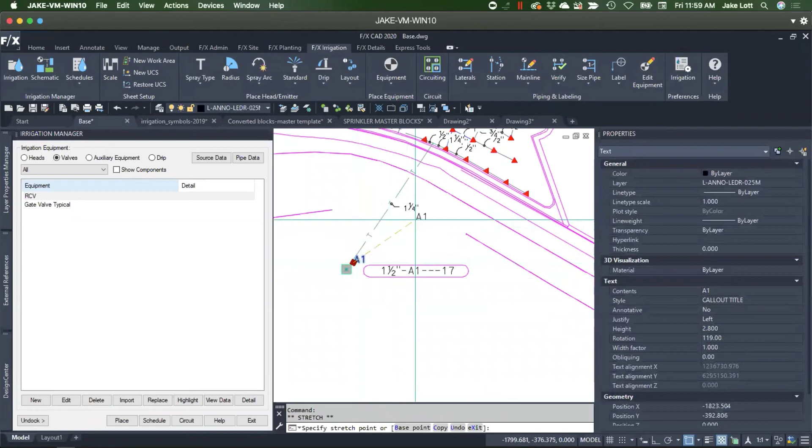Okay, so you want it here, right click, and then move this guy over here. Yeah, so that way, and then maybe put a circle around him or something. I don't know, but that way you have that, and maybe even make that more bold. I don't know however their standard is, I would kind of have to see if that matches the look of their standard.

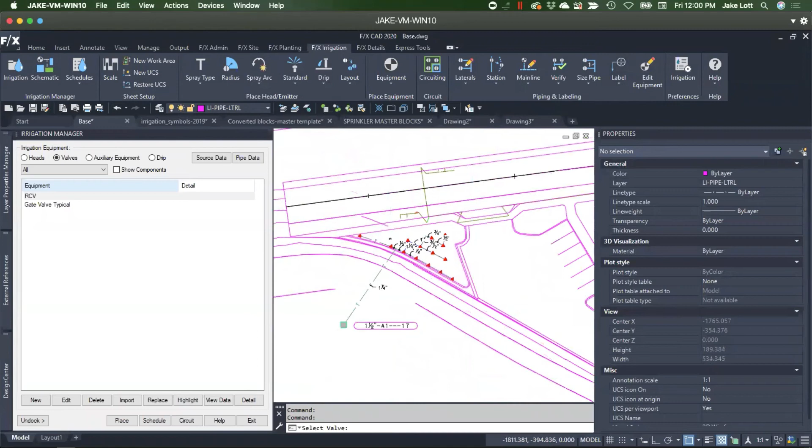Yeah, so you could tweak things in the list here. But then, changing the valve number will update that piece of text. That's the whole beauty of it. Yeah, yeah. So he changes to B1.

I think that basically covers us on these questions. So yeah, obviously got a few that I wasn't able to mention out loud, but I did type answers to those other people, I hope that was good. I think it looks like we had some good interest. I'm sure if you guys think of more questions, please email us. We may very well need a follow up on this because it's obviously a very large topic with a lot we can go over.